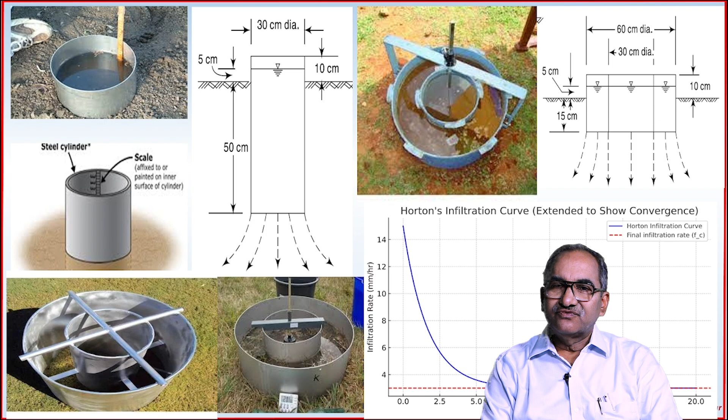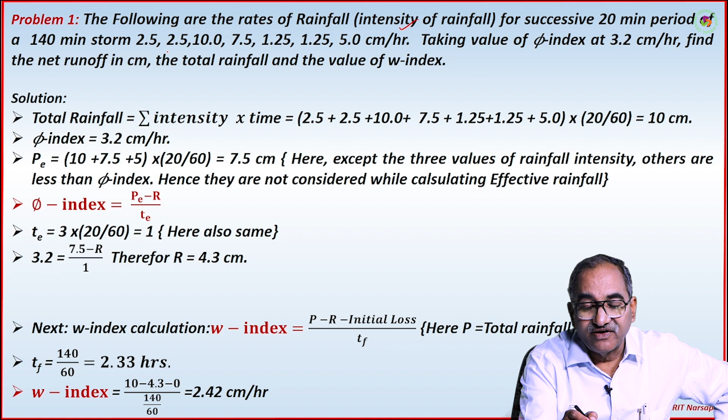In today's lecture, we discuss some problems. The following are the rates of rainfall, that means rainfall intensity, for successive 20-minute periods of a 140-minute storm: 2.5, 2.5, 10, 7.5, 1.25, 1.25, 5.

Suppose I draw a hyetograph like this. 0, 20 minutes, 40 minutes, 60 minutes, 80 minutes, 100 minutes, 120 minutes, 140 minutes. Here it is time, here it is rainfall intensity. On this axis, 2, 4, 6, 8, 10 maximum.

So the initial one is 2.5. The next one is also 2.5. Next one is 10. Next one is 7.5. Next one is 1.25. Next one is 1.25. Next one is 5. So whatever we have drawn is nothing but the rainfall hyetograph.

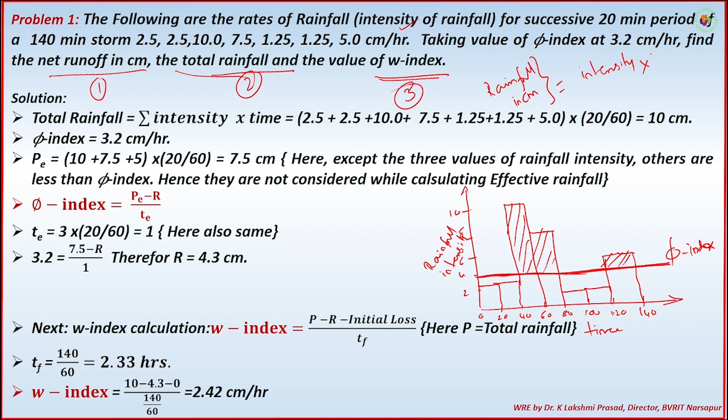How to calculate total rainfall? Rainfall in terms of depth units, rainfall in centimeters, is equal to intensity into time. That's all. During the first 20 minutes, 2.5 centimeters per hour into duration, 20 minutes; I want hours, so 20 by 60. 2.5 into 20 by 60.

Next one is again 2.5 into 20 by 60. Next is 10 into 20 by 60, 7.5 into 20 by 60, 1.25, 1.25, 5 into 20 by 60. So sigma intensity into time, but be careful: the time units should be in hours. Here he has given minutes, I converted into hours. So total is 10 centimeters. The second answer is over; the total figure corresponds to 10 centimeters of rainfall.

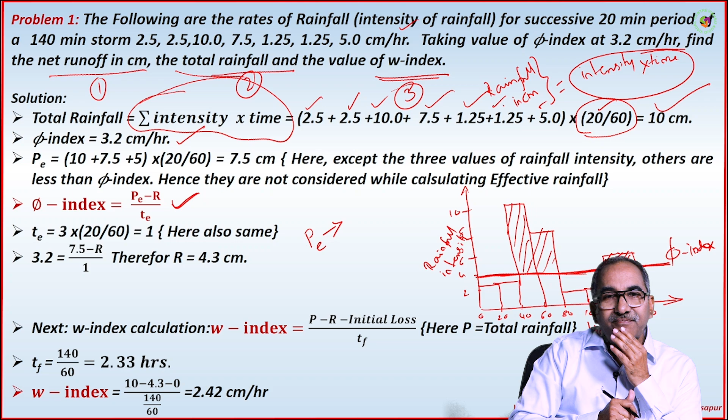What is our next question? Net runoff. He has given phi index 3.2 centimeters per hour. The equation for phi index: immediately you should write (Pe minus R) by te. Pe is effective rainfall, R is runoff, te is effective time duration. Pe means effective: during that duration, the rainfall intensity is more than the average infiltration rate, which here is nothing but the phi index.

The first duration, it is less, so it is not counted. Second duration, still less, not counted. Third duration, it is more, so it is counted. Fourth, counted. Fifth, no. Sixth, no. Seventh, counted. So we counted only 3. That's why I put 10 plus 7.5 plus 5, in centimeters per hour, into each duration, 20 by 60 hours. So 7.5 centimeters.

Why only 3 considered? You should know this is our first logic, even in phi index calculation. Except these 3 values of rainfall intensity, others are less than phi index, hence they are not considered while calculating effective rainfall.

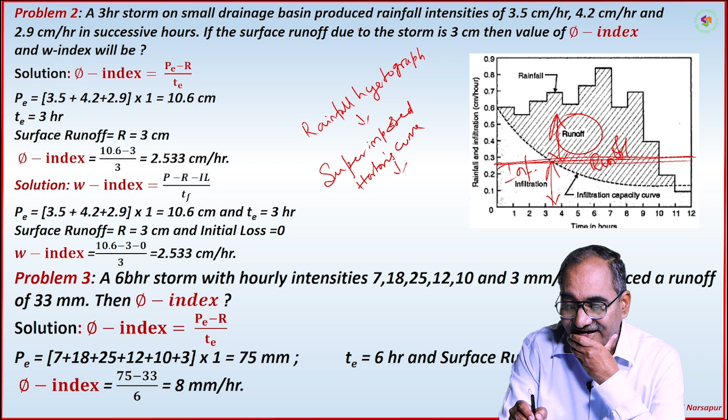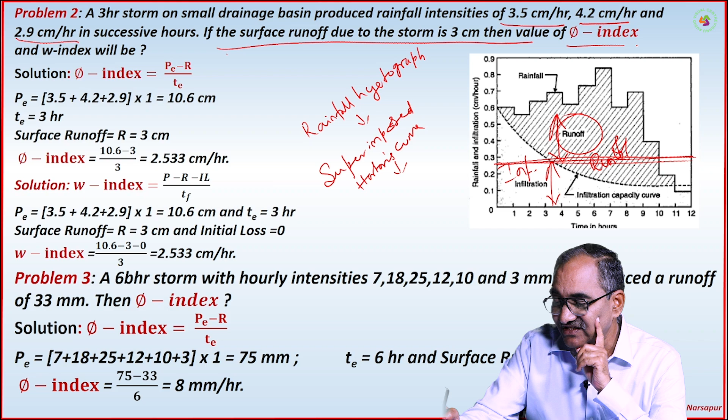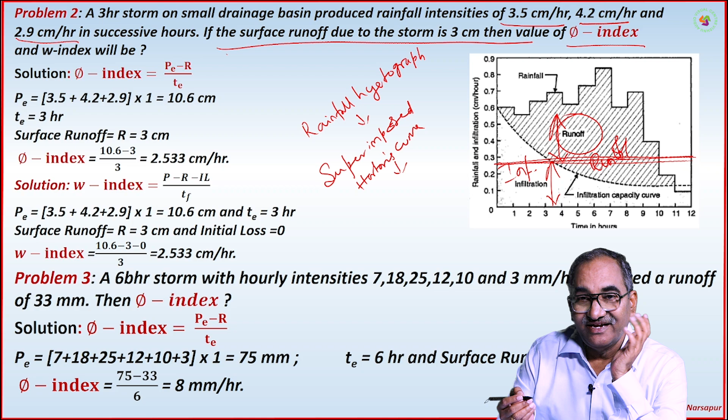A 3-hour storm on a small drainage basin produced rainfall intensities of 3.5, 4.2 and 2.9 centimeters per hour, three rainfall intensities in succession. If the surface runoff due to the storm is 3 centimeters, what is the value of phi index? To calculate the phi index, I want PE, which means the effective rainfall.

So if I draw it, 3.5 centimeters, 4.2 centimeters and 2.9 centimeters. The total surface runoff volume is 3 centimeters only. So effective rainfall is all 3 put together, and the effective rainfall time duration is 3 hours.

Then we found out what is phi index. Then what is W index? All 3 together is 10.6. The total duration is 3 hours only. Surface runoff is 3. Initial losses are 0. So here both are going to be the same.

Again, a 6-hour storm with hourly intensities of 7, 18, 25, 12, 10 and 3 mm per hour produced a runoff of 33 mm. Now phi index is not known. So total 75 mm minus this, divided by the total. That's how I calculated this. TE is 6 hours, surface runoff is this.

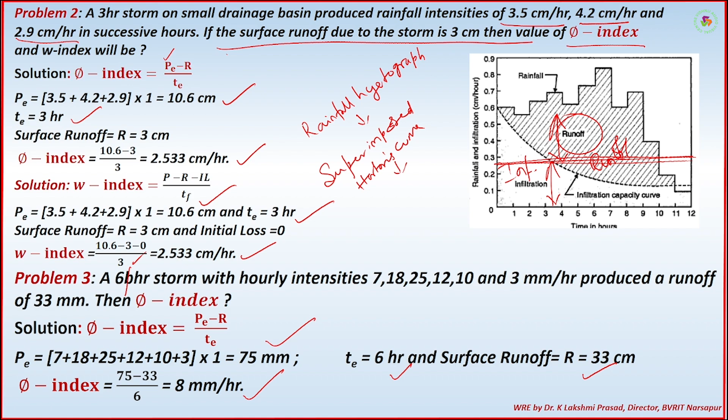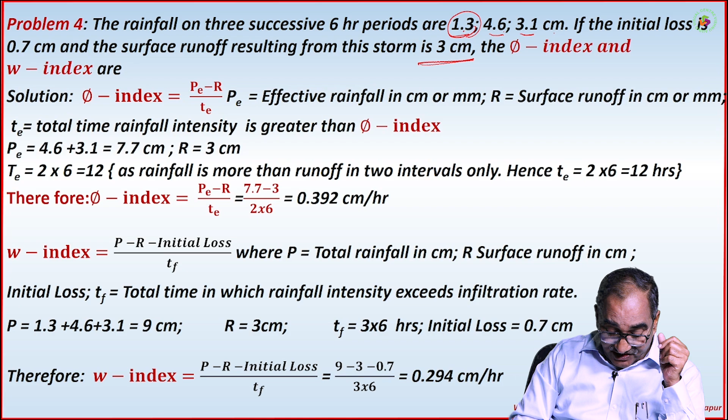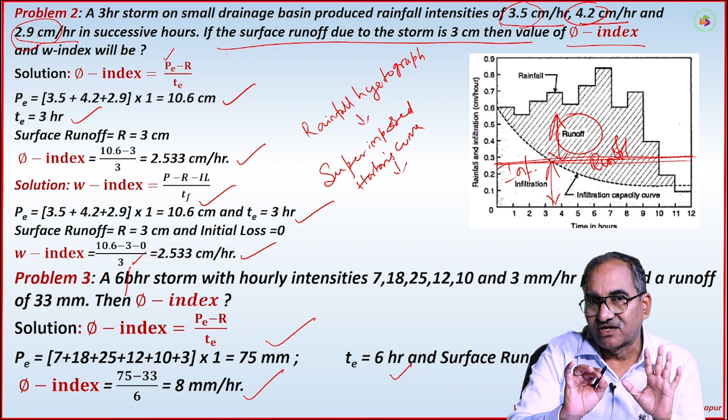In the previous problem I got rainfall intensities, whereas here it is only rainfall values. Now runoff also I got. During all these 3 times, is the runoff there or not? During the first period, there is no runoff at all. So understand the difference: in the previous problem, these are all intensities. I am not considering intensity versus centimeters, only intensities versus intensities or centimeters versus centimeters.

So here 1.3 centimeters doesn't contribute anything to runoff, because runoff is 3 centimeters. So this is 4.6 and 3.1, and 4.6 plus 3.1 is 7.7 centimeters. The first period doesn't contribute anything; only 2 periods are contributing. So we have put those 2 and got the answer.

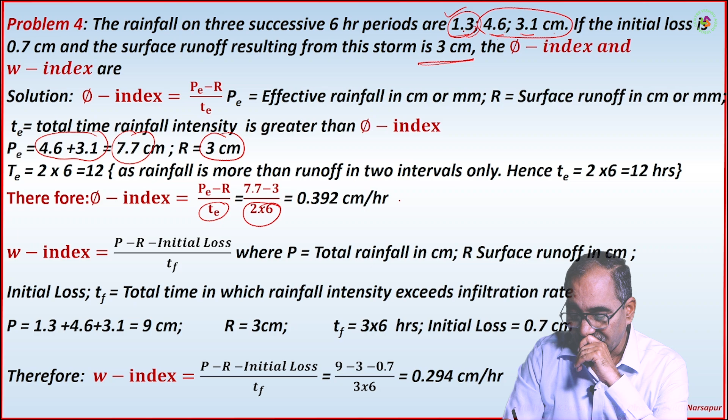Whereas when I take the W index, I take the total: 1.3 plus 4.6 plus 3.1, 9 centimeters. And this is runoff, and total duration is 3 into 6. That's how I calculated this.

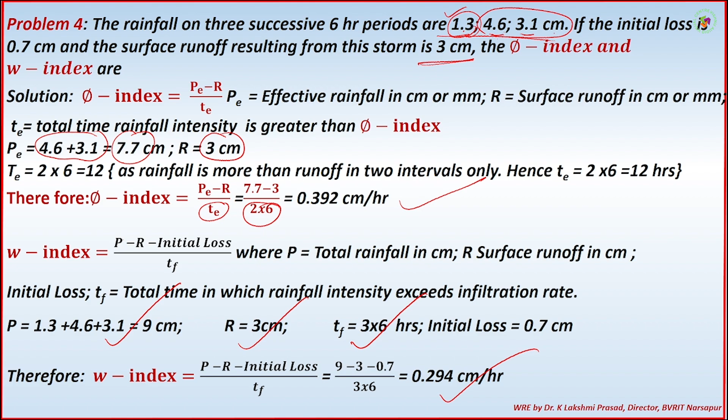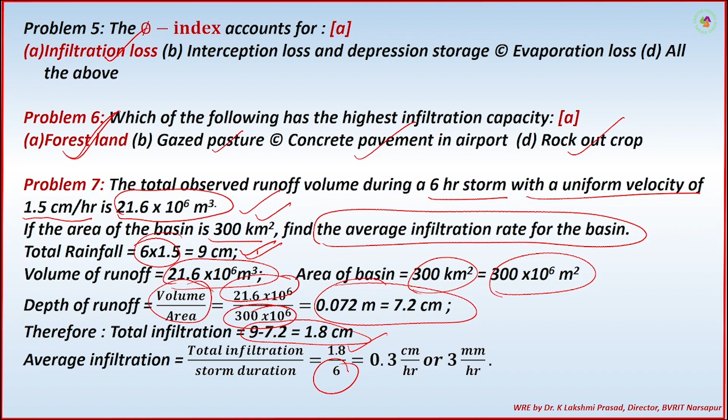What happens to the rest? 9 minus 7.2 naturally has to be infiltration. Then the average infiltration rate: 1.8 centimeters in how many hours? 6 hours. So what is mm per hour? This is the rate. So this completes it.